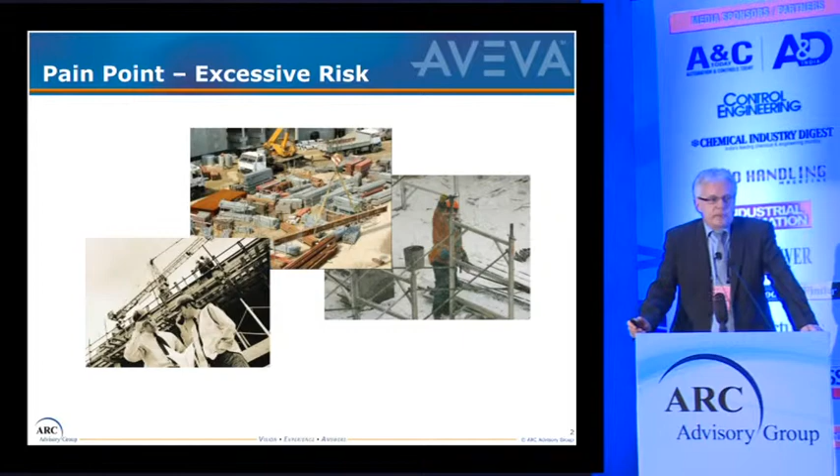Another issue here is poor efficiency. So the Construction Industry Institute in the US has made a survey, or has actually made several surveys over many years, and they came up with these figures.

And what you see here actually is that a construction worker in an average project is spending 27% of his time with value-adding work. That's a little bit more than a quarter.

Okay, to be fair, he is also doing a lot of preparation, okay? So, but that all together is practically a third of his time. A third of his time he is doing value-adding work. The rest is waste.

So when we look at these figures here, we are talking about excessive travel, because you go somewhere, you see that the material you have to install is not available, so you move somewhere else. That takes time.

We are waiting for information, for documents, for drawings, and for equipment, and for literally everything. So the worker is just sitting down and is waiting. And this waste, this adds up.

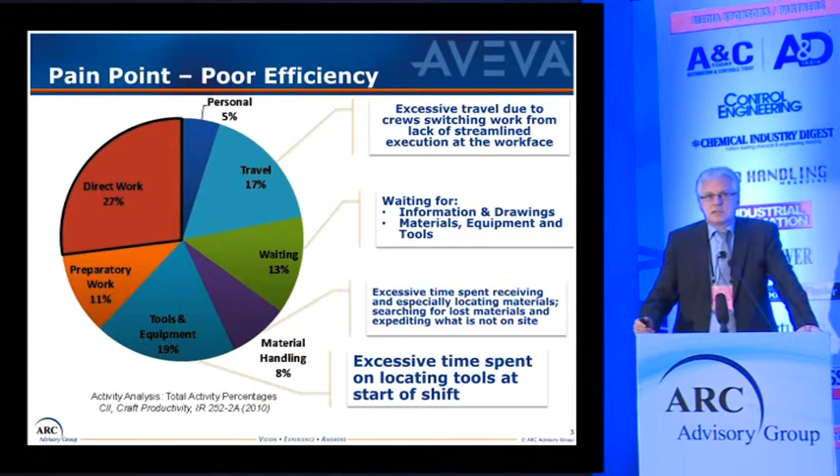So again, at the end of the day, we see something like that. That's rather poor. And it's of course not only waste, which is bad itself, but costs a lot of money. We are wasting enormous money here.

So for our solution, and this is what we are talking about, construction management is a solution from AVEVA. The target number one is efficiency. So the goal obviously is, if you look at the craftsman's workday, what we want to do is to increase the tool time, get the idle time and the traveling down.

Okay, so just to give you an example, in a normal construction project, we are looking at craftsman's work, which is accounting for about 40% of the cost. So 40% of the overall project cost is labor. So if we can improve something there, we save a lot of money.

And that's of course what everybody is looking for. So our target customers are owner-operators and EPCs. And they all share the same idea that we have to improve in this area.

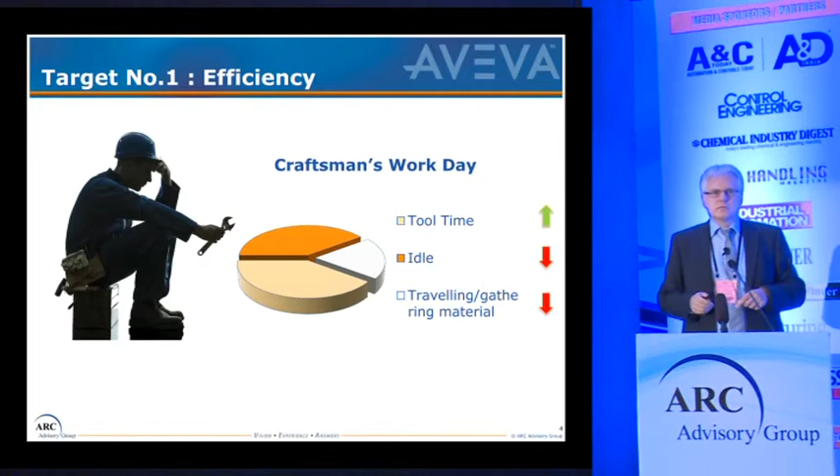So again, the Construction Industry Institute in the US has proposed a roadmap how to address this challenge. And what they are coming up with is something they call work packaging and workface planning.

This term workface planning seems to be rather Canadian, to be honest. So it's now actually over the last years it has crawled down into the US, and now from there it's spreading. So we always call that detailed planning because the devil is in the detail.

So work packaging, workface planning, and what we are talking about here is how to eat an elephant, practically. Because what we need to do, we have a huge, big project, and now we cut that up into manageable pieces. And a manageable piece, that is a work package.

And to use this quote here, it's all about preparation. So prepare the work. And we had a customer once who said, oh, it's all not that difficult. This is very philosophical, and the world is way easier. It's just plan the work and work the plan.

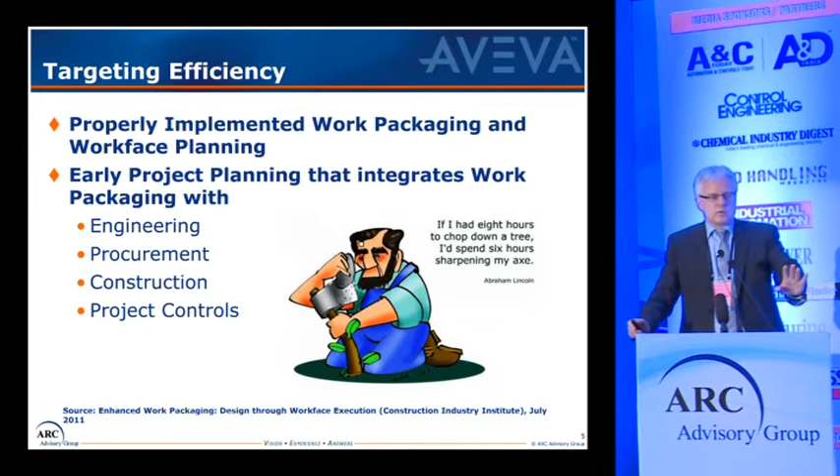And then you're set. Okay, and then we are talking about this excessive risks from the first slide, and it all falls apart. But still, this is the right road in our understanding.

So what is a construction work package? The construction work package is, as the term is suggesting, it's a box and there's something in it. So the content of a work package, from our understanding, this is a description of the work scope and the budget. We are talking about materials, we're talking about documents, we're talking about drawings. We need a schedule.

And we need responsible crews, trades, and contractors to execute the work, because that's what we're talking about, right? The work package is a piece of work that has to be done.

Still, this is rather high level. So for those of you familiar with project management terms, we are talking about work breakdown structures, and on the lowest level of the work breakdown structure we find our construction work package. But from our understanding, that's not detailed enough.

So we would like to go one level further down, and we call this level the installation work package, which is sort of a recursive definition, because if this big brown box contains the construction work package, then the yellow boxes are the installation work packages inside.

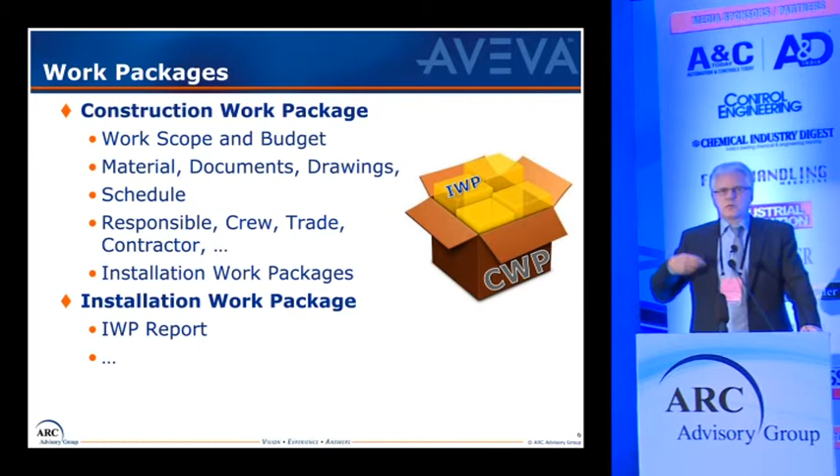In the rest of the presentation, I will tell you how to put a work package together. Or as a colleague of mine recently called it: this is the cake, and now we have to learn how to bake it. The first step here is the scoping.

It's a little bit like when you have to prepare dinner, and you go to the supermarket, and you drive through the corridors with your shopping cart, pulling stuff off the shelf you need for making dinner. The majority of you don't know what I'm talking about, but there are a few ladies here who have a clue, and you can ask them later what that means.

So actually we pull together the things we want to install in our work package, and we do this with the help of a 3D model. We provide an environment where somebody can go into the 3D model and pick the items he needs for his work package, and put this list of items together. It's very visual, so you can practically see what you have to do.

That's quite helpful, obviously, but it's not enough. What we have also come up with recently is complete automation. So what we are doing is automating the link between a work package structure and a 3D model, so we can assign the items from the 3D model automatically to a work package with a rather simple mapping mechanism.

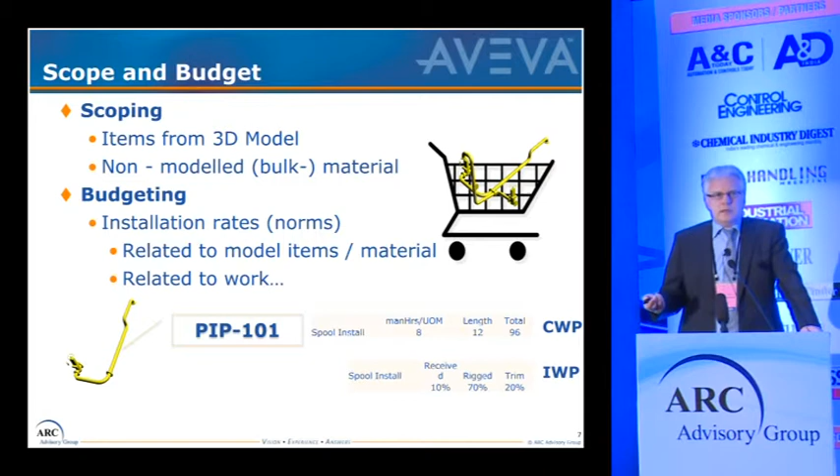And this can all be automated. Another aspect is material availability. My pipe spool under the snow, you know.

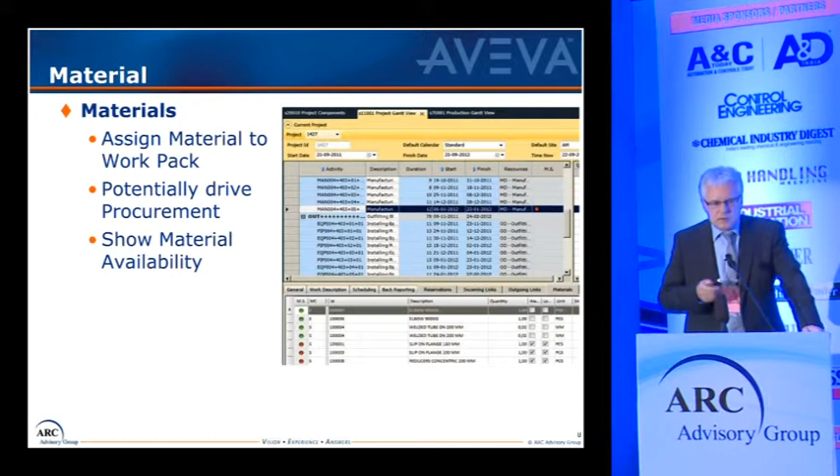Here we see a list of work packages, and there is a red indicator. When we drill down into the details, we see that we have material items assigned to our work package, and some of them are missing or won't be available on time. This is very important information, especially when looking into the future.

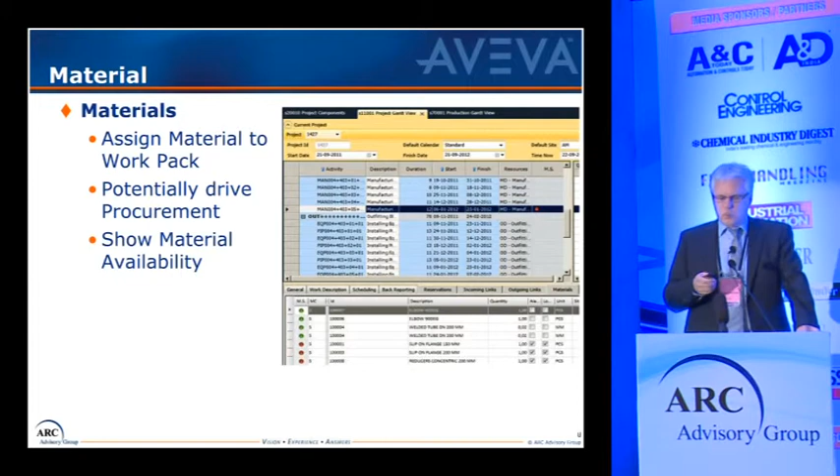So I have created a work package. I want to execute it on a certain day, but this screen tells me it won't work because the material is missing. So I can reschedule my work package, or most likely I grab the phone and call the procurement guy and ask him what's going wrong and please do something, because of course I don't want to change my schedule. So this all feeds into this early warning mechanism.

Another aspect is documents. So we have a mechanism in the system to manage documents, to pull documents out of document management systems with predefined integration gateways.

But one important feature is also to make life easier for people. There is a mechanism built in that can link objects to parts, documents to parts. So for instance, if you have to install a pump and the vendor provides an installation manual as a PDF document, what we can do is link this PDF document to the pump automatically in the background.

So if you do your scoping and assign the pump to the work package, the document in the background automatically follows. You don't have to worry about that, you don't have to do multiple assignments. You just assign the real world object practically, and everything attached to it follows automatically in the background. Another aspect is rather simple.

Of course, when we do the scoping, we can dive into the 3D model, turn it around, zoom, select certain items, and make a snapshot. We put annotations on the snapshot, little clouds and text, saying please pay attention here and there. And then we attach that also to the work package documentation.

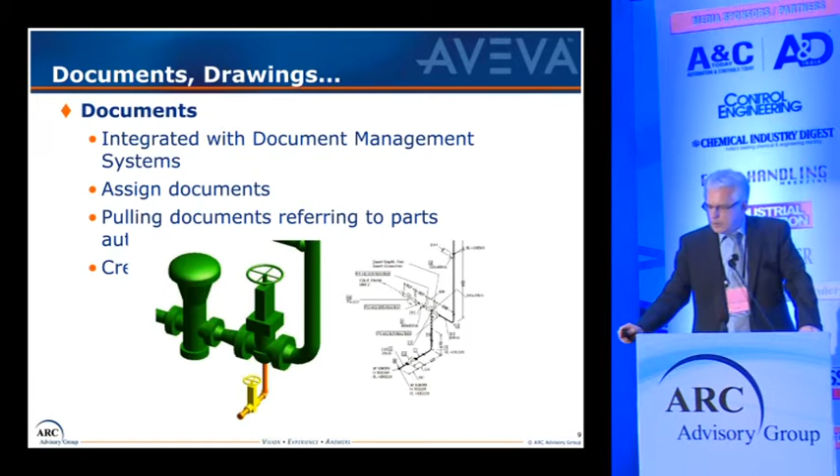Then we come to the scheduling aspect. So of course we can do scheduling. The system is equipped with everything you need. Not only that, we have built-in earned value management systems and so on, but we recognize that in this type of industry, in construction, Primavera P6 is the de facto industry standard. So we have integrated everything closely with P6.

What we can do is import a work breakdown structure. We get our construction work packages from Primavera, take them over into our environment, do all the detailed work below, and then feed the progress, status, actual dates, everything you need, back to Primavera to keep it alive.

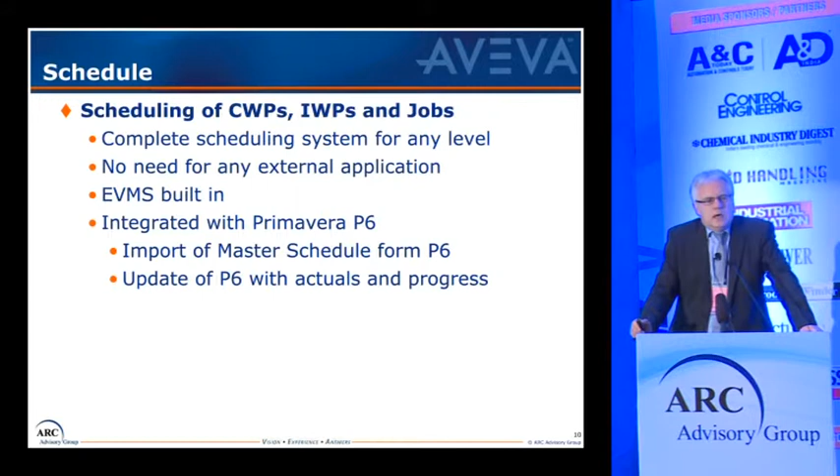But when we have done this, so we have done the scoping, attached our 3D model items to a work package, and scheduled the work package, this actually is the starting point now for something we call a timeline simulation. Because now we actually know when we have to install which piece of the model, or actually of the plant, so we can run through the time and simulate that.

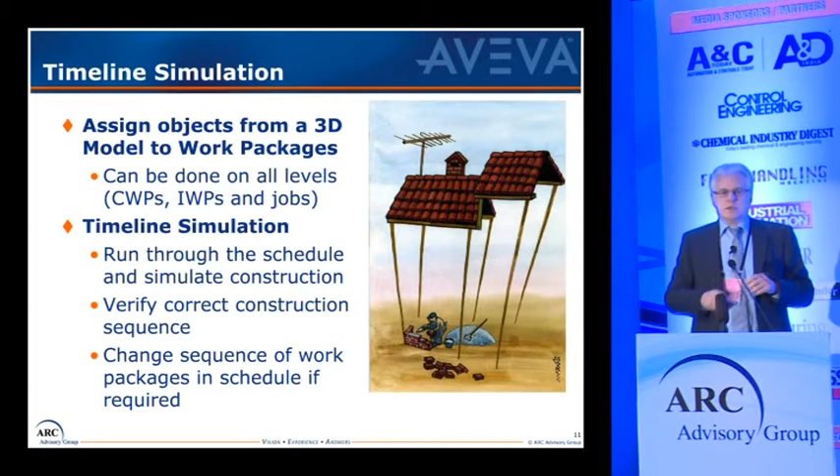The purpose of that is rather straightforward. We want to avoid this. We want to have a facility to make sure we do things in the right sequence. And this is a screenshot of the application. So what we are doing here, we run through the time. This is our schedule, this is the red timeline. We run from the left to the right, and we pop up the model step by step, and it's getting bigger and bigger with all kinds of status information.

We color code the model by status, and that can be used to verify that we are working on the right sequence. In this example, it's very big objects, but this is not necessarily the case because we're also talking about detailed planning, installation work packages, where we're installing a couple of pipes. Then it really makes sense, because you can see on the detailed level whether you are on the right track or not.

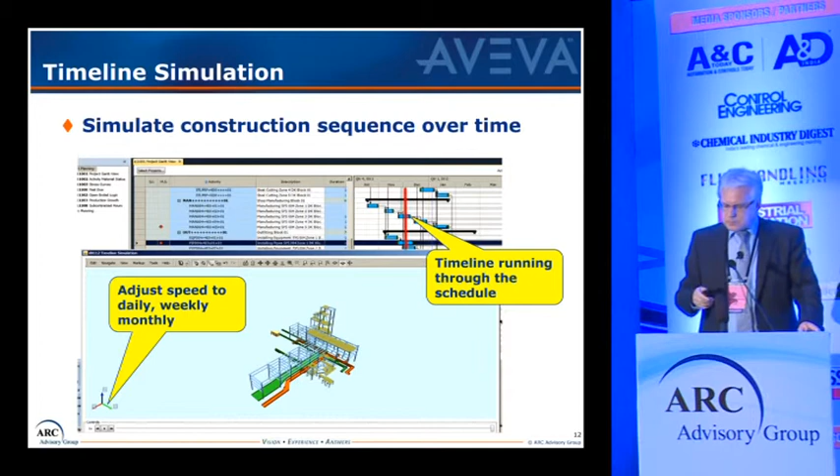So sometimes you see things in the 3D model, in this simulation, floating in thin air because somebody wants to install something and there is no foundation yet. Then you see my schedule is wrong, I have to go back, reschedule all my activities, and verify if the sequence is correct now. That saves a lot of headache in reality later.

Within this planning environment, we have created over the years a concept we call vertical planning. The vertical planning consists of mainly three parts: the project planning on top, then the workface planning, or detailed planning as we called it in the past, below that, and on the bottom, somebody has to do the work, right?

I mean, to be fair, this is aspiration, okay? This is utopia. This is reality, and these are the poor guys at the end of the food chain who have to live with that and have to do the execution.

Our idea is always to say, we do the rough cut planning, the high level stuff on top in the project planning area. Then we go down and do the detailed planning next. Then we release, meaning we want to make sure these guys are preparing the work for those who have to execute the actual work. Only when that is doable, when we've checked the feasibility, do we have all the documents, all our drawings, is all the material available, do we have the right manpower in place.

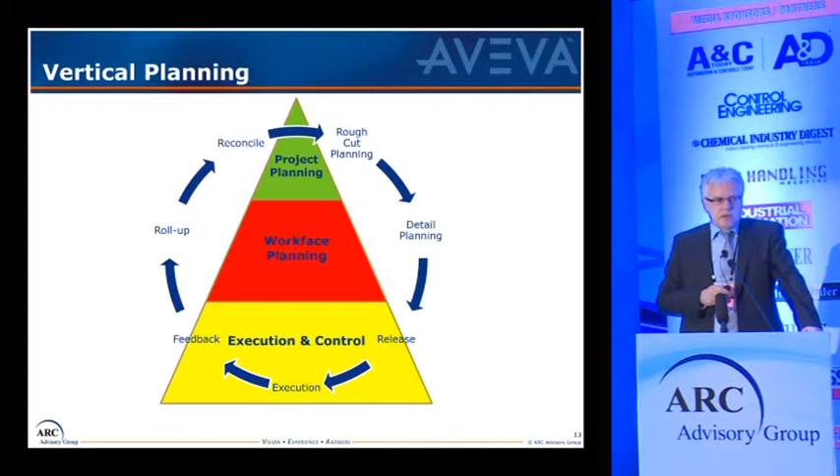But there's a facility to do that. Then we roll it up, especially progress status, and hopefully somebody is reconciling the plan, because, as I said, this is a little bit utopia. So that was all made under certain assumptions. Maybe that went all wrong, so we have to rethink our plan and adjust, and hopefully somebody is actually doing that.

So I talked about visualization and early warning. This early warning, and I've heard that phrase previously, is quite an important aspect. What we want to do is pull all information together and visualize everything to avoid big disasters. In other terms, it's way easier and more comfortable, although it sounds crazy, to bang your head against that sign and not to hit the bridge.

Again, one of the visualization aspects is our material status. We try to tell those who have to execute the work or plan the execution whether everything is available or not. The story is, of course, way bigger in the background. We have an entire materials management system, we can do everything from procurement to expediting to warehousing and so on. But sometimes we face projects where a customer says, oh, I have something already, I have a self-made system, so please integrate. And then, of course, we are ready to do that.

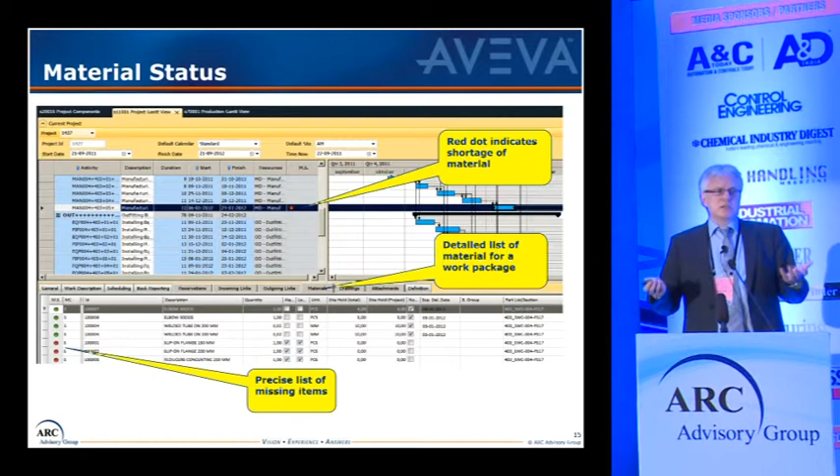Project status, I mentioned that. So what we are doing in visualizing the status of the project, classically you do that with earned value management data. You see SPI, CPI figures, all kinds of performance indicators, but it's also quite interesting to directly look at the 3D model and get the items color coded by status.

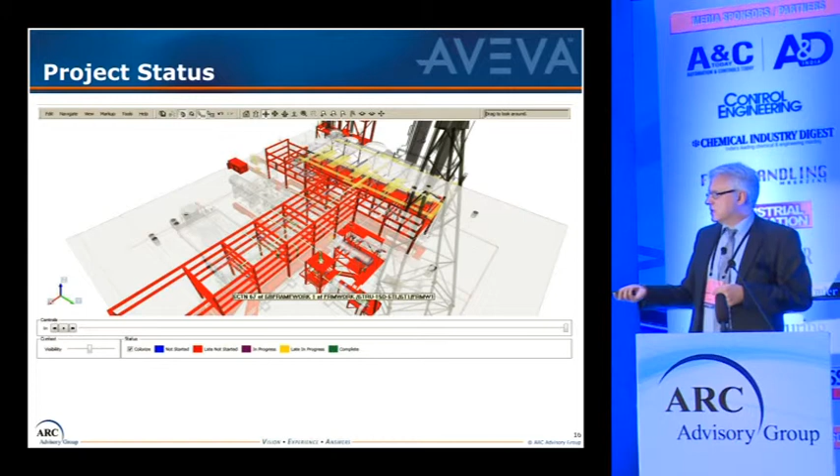So this one here, the red one, says, for instance, that's all late not started. Okay, so we gather all this actual data, we put it into a sausage machine, we are rolling it up into the plan, and then we visualize it finally in the 3D model.

So, lessons learned. I have to say that owner-operators of plant, they like this very much. This is exactly what they were looking for. This is transparency. So when you have a solution like this one in place, it will give you everything you need.

And mainly what they are asking for is actually getting an impression. Where are we? Where are the problems? Are we on time? Are we late? The reason for this, why they are so keen on that, is rather obvious.

We are talking to companies who are about to invest into a project worth $3 billion US, and they expect a return on investment already after 3 years. So this is, for me, this is a license to print money. And every day you are losing, or every week or every month, it's extremely expensive. So getting a better feeling about what's going on, this is of course priceless.

The flip side of that one is now that the EPC who is actually doing that project is sometimes forced to take up a solution like this because the owner desperately wants to have it. So our suggestion is to all EPCs, do that before you get forced. So implement that as early as possible. You have to do it anyhow.

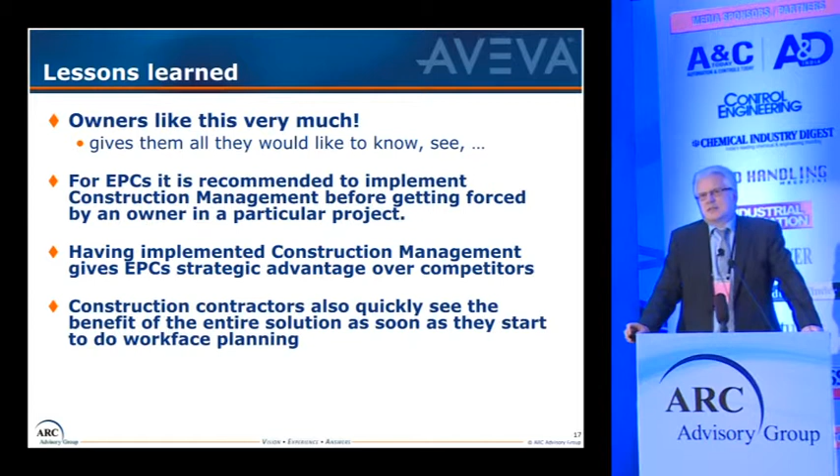And I'm not 100% sure whether our solution would have rescued that. Probably not. But maybe a little bit. I'm quite confident that we can provide at least a little help to that one.

Okay, so finally, what I would like to explain a little bit more is about AVEVA's solution portfolio. So we are talking about integrated project execution, and that has, in our understanding, 4 major elements. And this is the engineering and design. And I guess when you hear AVEVA, what many of you have heard about is PDMS or E3D, the latest 3D modeling version. This is what AVEVA basically stands for, what it made famous.

But there is some other stuff. So we are also talking about materials management. We have solutions for that one, mainly for catalog and specification management. And as I said, for, let's say, all the rest, which is, of course, huge. There are many functions in it, from procurement to expediting, warehousing, material requisition, and so on. We have our construction management solution as part of that.

And underlying, we have these, what we call digital information hubs. Because the goal is that during a project execution, we want to gather all the data we can find, all the documents, all the drawings, of course the 3D model, to finally have what we call a digital asset. Because our mantra is, for every physical asset, you should have a digital asset.